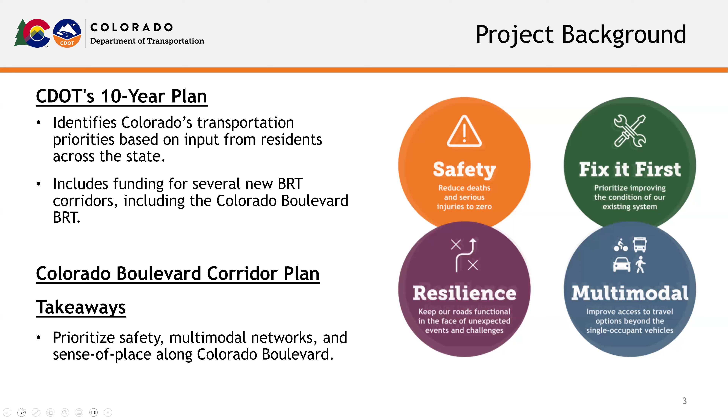Our study area is basically between the 40th and Colorado Station, which serves the A line going out to the airport, between Union Station and the airport. That's just south of I-70, and the project will extend basically to Southmoor Station. We're really looking at the key infrastructure to be between the 40th and Colorado Station and Yale Avenue, but the actual bus service will extend all the way to Southmoor Station. That's a determination we made with our project partners, the City and County of Denver, CDOT, and the City of Glendale.

We initially thought this project would terminate at Colorado Station just south of I-25, but it made more sense to build on the route the number 40 already takes. So really this is a true upgrade of the number 40 from a local bus to bus rapid transit. We're very focused on improving safety conditions on Colorado Boulevard, but also ensuring the bus rapid transit is fast and reliable. Today, the number 40 is one of the most delayed routes in the entire RTD system. It has strong ridership, about 3,000 riders per day. We expect that can grow quite a bit, but we also want to better serve the people who already use the bus and make sure they can get where they need to go on time and rely on the bus to show up when they go to get it.

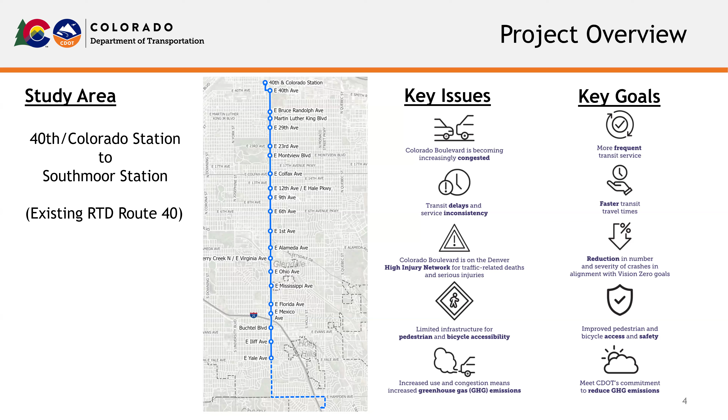When we talk about bus rapid transit, we're really talking about a service that in a lot of ways pulls the best features of light rail into the bus line. So rather than having a regular bus stop, you have an enhanced station with a platform that's almost the same height as the floor of the bus, which makes it a lot easier if you're using a wheelchair or rolling a bike onto the bus.

There are also ticket vending machines, where you buy your ticket before you get on the bus, similar to what you'd do with a train. Real-time information, where a display tells you when the next bus is arriving, kind of like a train station. And nicer station architecture—we'll be trying to create something more distinctive than your normal RTD bus shelter on Colorado Boulevard. We see that as a community benefit, something that shows we care about Colorado Boulevard and want people to be on this line and on the street.

Finally, we'll have components at intersections called transit signal priority. That's where the bus communicates with the signal controller so that when it approaches, the signal will either stay green or default to the next green cycle if it's on red. That lessens the time the bus is stuck at red lights, which improves speed and reliability. We're also looking at potentially adding bus lanes to Colorado Boulevard as well.

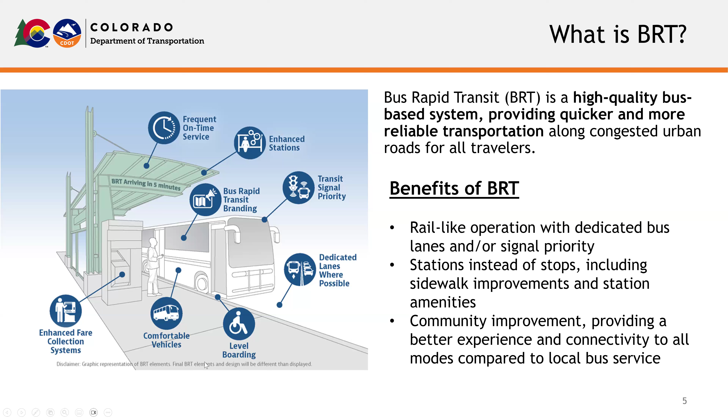Right now we're in what we call the alternatives analysis phase of the project, and the purpose of that phase is to determine what the BRT should look like. We're focused on three key forms of BRT—this is the foundation of what we're doing right now—figuring out through analysis if the BRT should be in the middle of the street, similar to the design of the Colfax BRT, if it should be on the sides of the street along the curbs, which is the design we're moving forward with for Federal Boulevard, or if it should be mixed flow, sharing lanes with traffic on the sides of the street, similar to how it'll operate in the City of Aurora on Colfax.

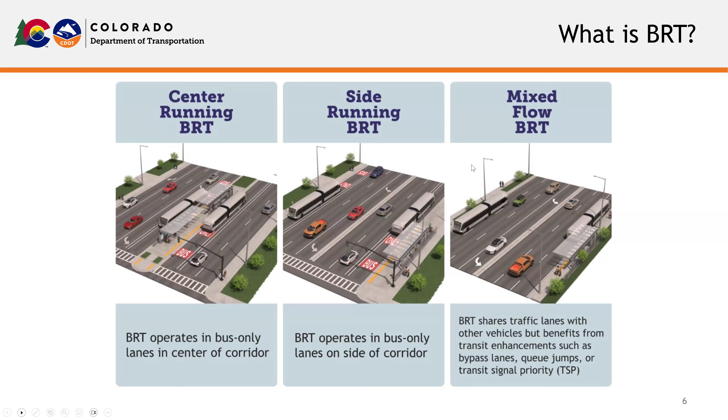Some considerations with these three types really come down to trade-offs. Center running is probably best in terms of bus reliability because it has the fewest conflicts with other cars and vehicles on the road, but it typically costs more to implement because it takes more right of way, and could potentially have larger right-of-way impacts. Side running is a little less exclusive—the bus lanes are still only for buses, except at driveways or intersections, where the bus needs to share the lane with other vehicles.

So drivers can turn into the bus lane and go into a driveway of the business, or when they approach an intersection, they merge into the bus lane to take a right on the intersecting street. So there's a little more friction with the other vehicles on the road, but we can manage those. That's one consideration with side running.

Mixed flow BRT basically has those same considerations as side running, except that vehicles can share the lane as they do today. So the bus would be in a lane with other cars. It would get stuck with traffic when it's congested. So there are implications for how fast we can make the bus move and get through the corridor with that alignment.

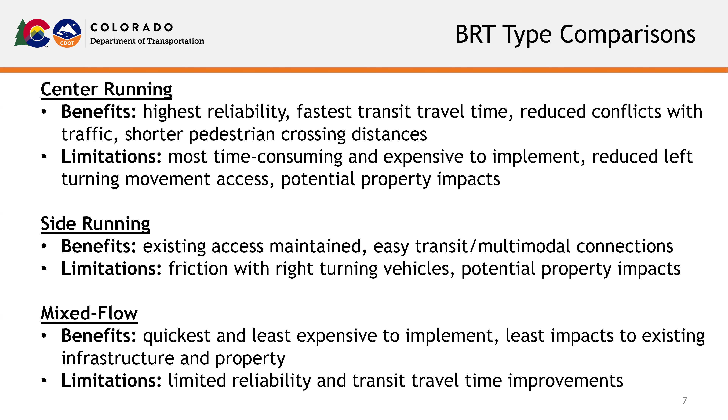As I mentioned, we started with a corridor plan. We had several stakeholder meetings, one at the end of last year and then two earlier this year. We completed that study, and I believe it's now on our webpage. If you haven't had a chance to look at the final product of that planning effort, it was really high quality, and we've pulled a lot of the data we analyzed into this project. Most importantly, we've been able to build on our engagement, including the stakeholder committee, so we didn't start fresh with a new effort for this BRT phase.

We are now fully in the BRT part of the project. We're going to be selecting what the alternative looks like, figuring out what BRT for Colorado should be. And then from there, we will focus on design and hopefully construction by calendar year 2028.

We have started our engagement specific to the BRT. In mid-September, on September 13th, we had an open house, which was our introduction of the project to the community. We had very good turnout, 168 attendees, which was more than I was expecting, to be honest. It was a very packed house, especially for the first hour. We got a lot of comments, and we had a survey online that we recently closed, but we had over 600 survey responses regarding the project. I have a little bit of information to share about what that feedback looked like.

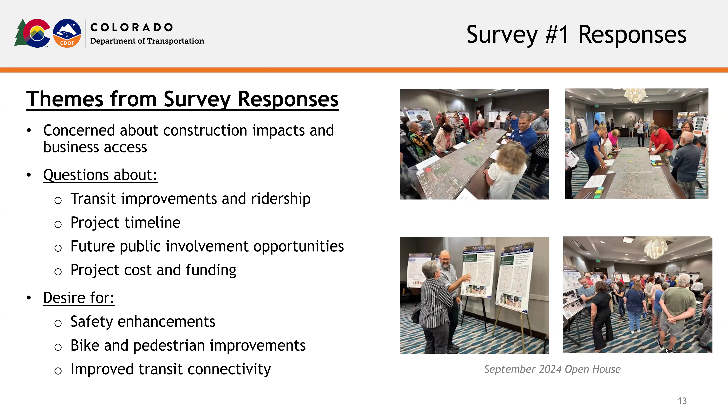The alternatives analysis is really a multi-tiered process to develop the design at a conceptual level for the corridor. We start with our vision and goals, then go through a step-by-step screening process. We've completed one of these steps, the feasibility screening, where we've taken all the potential options within those alignments of the BRT and thought about what will work and what probably won't.

The idea is to arrive at a recommended or preferred alternative through this multi-tiered process, where people have the opportunity to weigh in at each step and make sure we're thinking about the right things. Each step builds in detail, and this first step, which I'll cover in a moment, is really just high level—what is there room to do and what is there not room to do?

We've also broken up the corridor between 40th and Colorado Station and Southmoor Station into 9 different segments. This is because Colorado Boulevard over this long length is not consistent—it's not the same in each part of the corridor. It changes in character, land use, and traffic volumes change. So as we develop a BRT, we don't think it will be one design all the way through. It could change alignments, going from the center to the side, or from bus lanes to mixed traffic—it could look very different in some places than others.

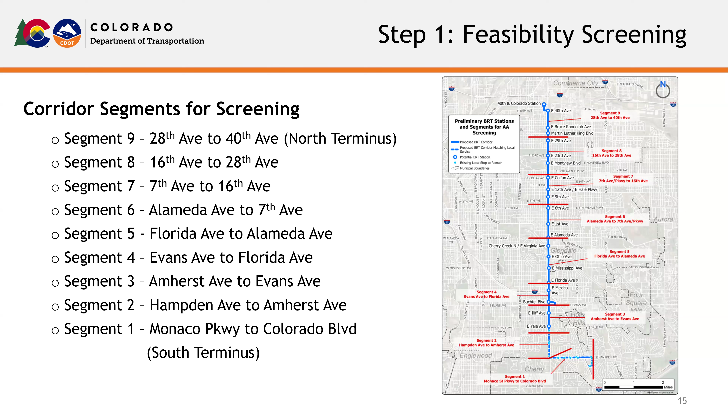As I mentioned, we start with a feasibility screening. We had 3 major criteria to consider whether each configuration would work or not. One was whether the configuration would require full property acquisitions—meaning the impacts could affect the building, take over 50% of the parking or business operations, or if it's a single-family residential neighborhood, the impacts would be within 10 feet of a house or leave less than 20 feet of the driveway.

So we really want to make sure that when we design this project, that we are certainly not impacting businesses unduly, and making sure that we're not impacting quality of life where neighborhoods are fronting Colorado Boulevard. So it's really important that we minimize these impacts as much as possible.

We also looked at partial property acquisitions. These are impacts where there would be perhaps some acquisition required on the property, in a matter of feet, but it wouldn't rise to the level of a full property acquisition. We really would work to minimize these - you'd be talking about maybe needing a few extra feet behind the sidewalk, something of that nature. So more minor impacts on this end.

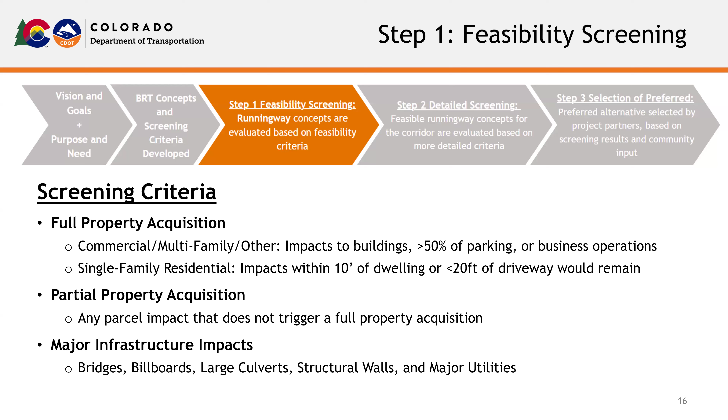And then finally, major infrastructure impacts. There are bridges along the corridor, certainly the bridge over Cherry Creek. We do not have the budget, or frankly the time because of our mandate to complete this project before the end of the decade, to be rebuilding major bridges in the corridor. Billboards are fairly hard to impact because there's a lot of regulatory issues that come along with those, and they are privately owned. Additionally, large culverts, structural walls, major utilities - things that would really take a lot of time and effort to relocate or rebuild. We don't necessarily want the BRT project to get caught up in that and have the schedule delayed. We really do want to deliver the project as soon as we can.

So a few concepts, and I'll go through these. This is the largest concept of the ones we looked at in the first screening phase. This would be retaining all the lanes that are on Colorado Boulevard today, and then adding 2 additional lanes for the bus rapid transit. That could either happen in the middle or the sides. As you can see, this would require quite a bit of additional right-of-way. So that is concept A.

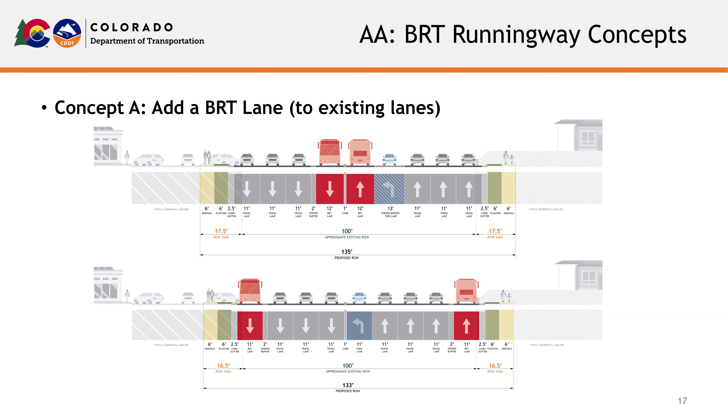Concept B would be taking one of the lanes and converting it from a through lane for everyone, for general purpose traffic, to a bus-only lane. In the center of the street, that would be a fully bus-only lane. On the sides of the street, that would be a semi-exclusive bus lane where it's primarily for the bus to go north and south, but if you were driving and turning into a driveway or taking a right at an intersection, you could use the bus lane for that. In this concept, we would have to do some minor realignment of curbs in some locations, just because the width of the street varies. So to get that consistency, we would have to do some localized curb work and roadway work. But otherwise, it would be repurposing some of the operations that exist today.

And then concept C is the same thing, only we would not do any of that curb work and localized road work. We would simply just change the roadway striping and then do any work related to the stations. So this has a smaller footprint than the last one, but also some considerations as we move forward.

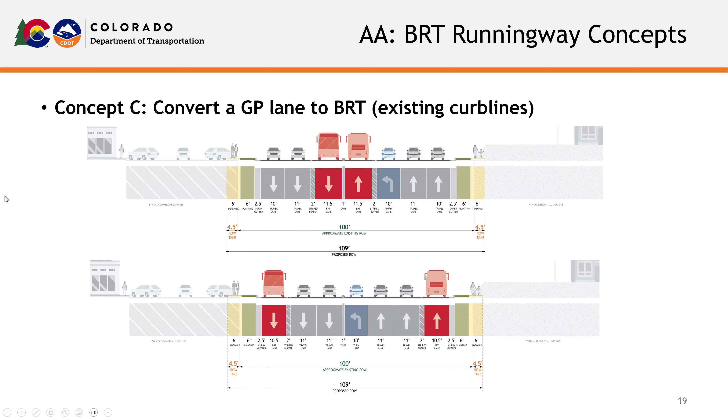And then the last concept is the mixed flow condition. This is the one where basically the roadway stays as it is, except that we build the bus rapid transit stations, as I mentioned, and then we do the signal work. That would be the way in which the bus would achieve speed and reliability improvements, in addition to having more buses through increased frequencies.

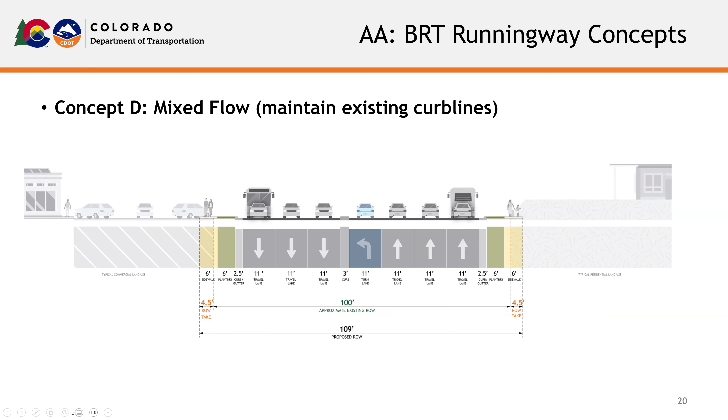And so in our first screen, which we did with our project partners - our project leadership team from the City and County of Denver, RTD, DRCOG, and the City of Glendale - we basically went through this process, looked at the impacts, and determined that adding 2 new lanes to Colorado Boulevard, in addition to all the lanes that are out there today, is just probably not feasible from a budget perspective, or probably from a community perspective as well, because there would be major impacts to private property in doing that. So concept A, from this point, we will not consider anymore.

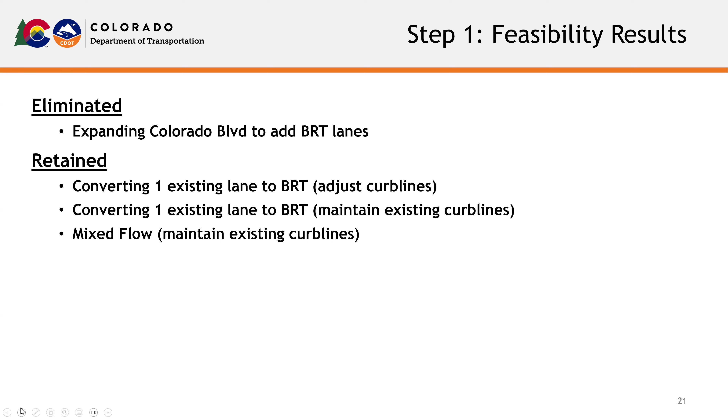And the next step of the process, where we get more detailed and think about different types of impacts, we will advance concepts B, C, and D. So the next screening process, or the next step, would be thinking about the things listed here: connectivity to other bus routes, connectivity to trails and bikeways, and certainly corridor safety. I think we'll be taking a pretty significant look at the crashes, which we've already started to do through that corridor plan I mentioned. We'll really dig into that in some more detail.

Think about the three options I mentioned, concepts B, C, and D. What do those do for improving travel time if you're on the bus, and what do they do to travel time if you're driving? Looking at those two things side by side is really important, along with traffic operations, making sure we don't make congestion worse on Colorado Boulevard. We all know congestion is really bad.

And then cost and equity concerns, making sure the solutions will meet the needs of the people who rely on the bus the most, and that we can deliver this project with a good cost-benefit ratio.

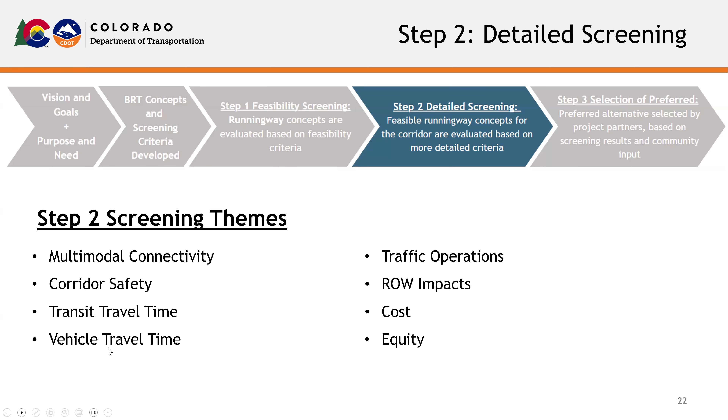That's the next step of the process, and we'll be sharing that in the next month or two. Our next stakeholder meeting is in spring of 2025, where we'll dig more into detail on these things. However, I'm happy to come to this group and provide an update at any point, before or after the stakeholder meeting. We'll have more information in the next 2 to 3 months.

That's basically the information I have for you tonight. I'm happy to take any questions or discuss any of the things I covered.

Thank you, Ryan. There were a few questions in the chat that were brought up, and I will present those. Bill asked, since this is a federally funded project, when will you complete the required environmental impact study?

Our goal is to have that done about mid-2026. We're just starting that. We'll have a lot more information and detail on it in the coming year, and opportunities to review some of that information as well.

Meredith asked, can side running be turned into mixed lane or vice versa for lane location? And will service run to Southmoor Station on all runs? Presently, Colorado Station to Southmoor is serviced on only a half.